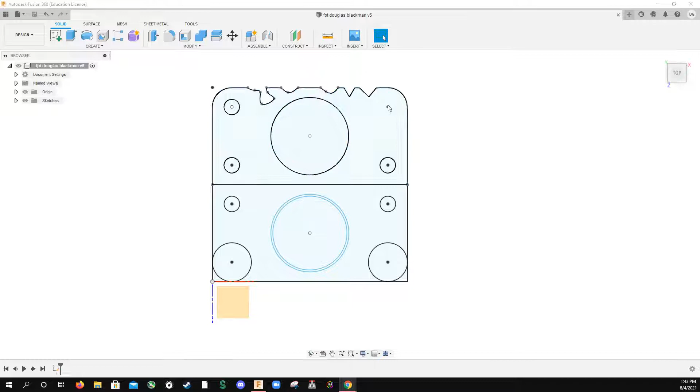So we're going to use the extrude button just here. I'm going to click the extrude button, and I'm going to have a look at this dialog box that comes up. We're not going to use the thin extrude. It's quite rare that you use that. That would just do an edge. We want to extrude the whole thing.

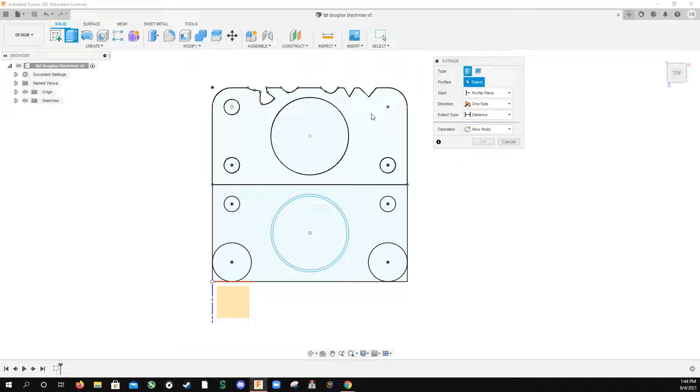And it's asking us for the profile. Now the profile is the shape that goes all the way around the edge and back again. So it's asking for the area that gets highlighted and shaded in a slightly different color. You can see this blue color here.

So I could select this circle, and that would allow me to extrude that circle upwards like this. I can select multiple areas at once as well, and I can extrude all of those up, and I can press the X to get rid of that.

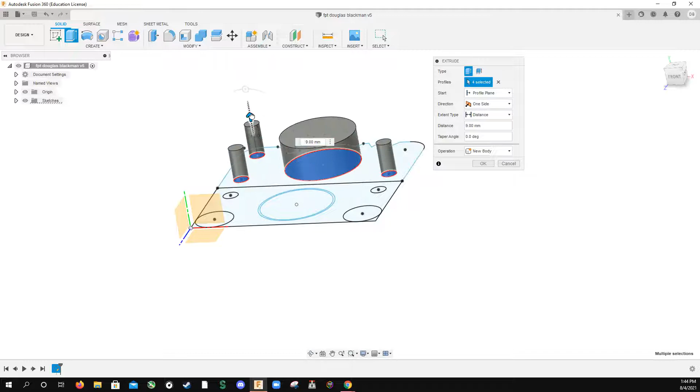And the area I actually want is this area here, and I want this to be 5 millimeters thick. So that's it, that's the only area I want. It's one-sided, it's only coming up once. It's coming up for 5 millimeters.

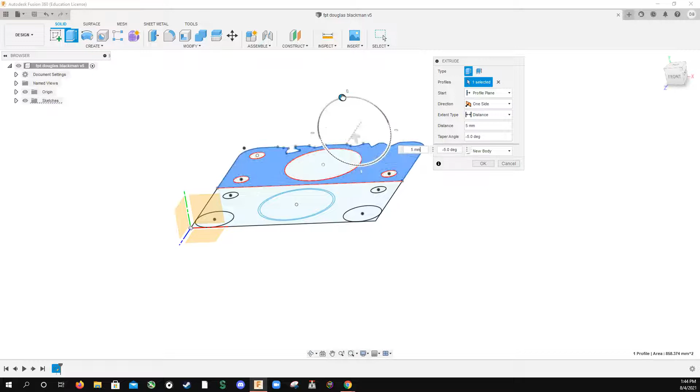I don't want it to have a taper angle. A taper angle means you can make it taper in, or it could taper out. This one's quite tricky because of the edge profile. And I'm going to press OK.

Now pressing OK creates me this new folder here in the browser, and you can see body 1 is now there, and I can make it visible and invisible.

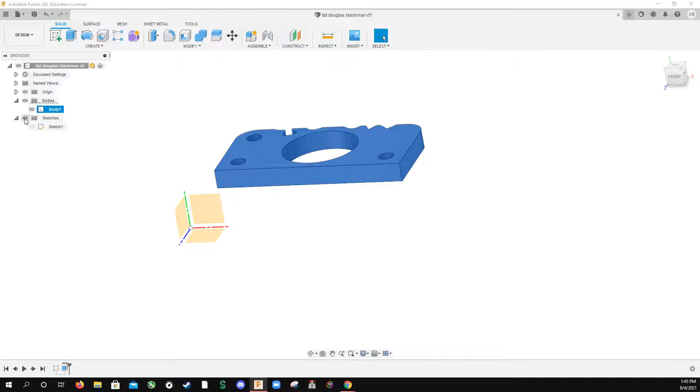Something that Fusion does that kind of irritates me is it will now automatically hide sketch 1. So the first extrude you do will hide the sketch. So if you draw something and extrude something and it disappears, that's what you need to do. You need to go to sketches and unhide it.

Next, I'm going to press extrude again, and I'm going to extrude this side here, and I'm going to extrude this one 5 millimeters as well. Now, what you can see occurring here is that these two pieces are joining together. It's trying to make them one block, and that's visible through the join operation.

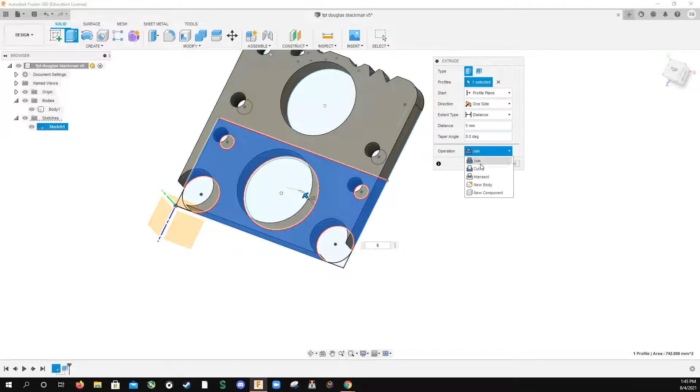Now I don't want it to do that. I want it to be a new piece. So I'm going to go to new body, and you can see my line has reappeared to show that these are two separate things. And I'm going to go ahead and press OK.

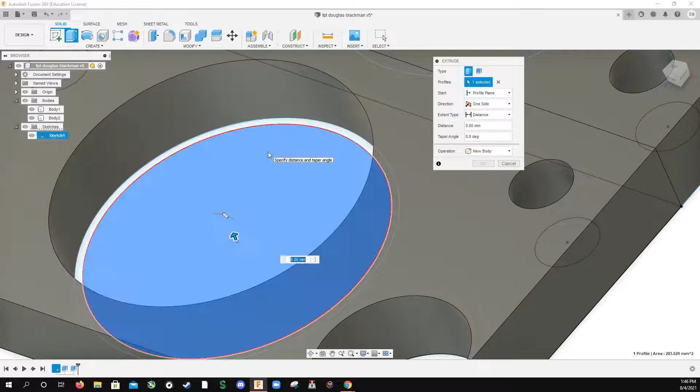And I'm also going to extrude the circle here in the middle. Now it's really important that I zoom in. I don't want to get this circle, I want to get the circle in the middle. So I'm going to select that one, and I'm going to make this one 10 millimeters.

This one does say new body because it doesn't touch, and I'm going to press OK. So I now have that in the middle of there. And that's how we extrude those pieces.

Once we've extruded these, what we're going to have a little look at is how to move these pieces. So there's lots of options when we move things.

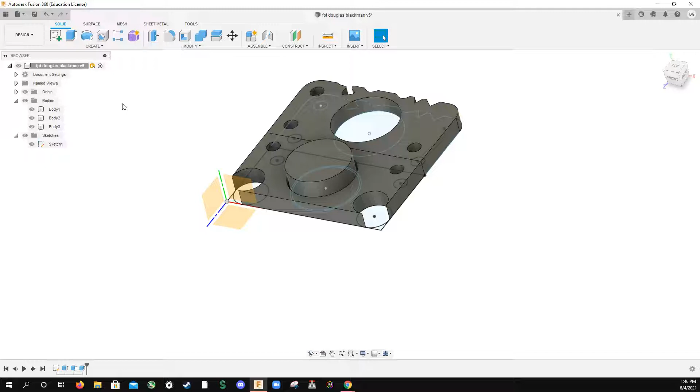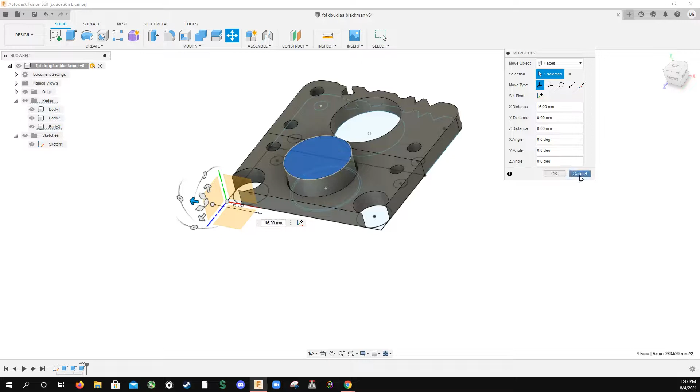So what I want to do is stack this piece here on top of this piece here. So I'm going to go ahead and grab body number 1, and right click on it. And that brings me to the move option.

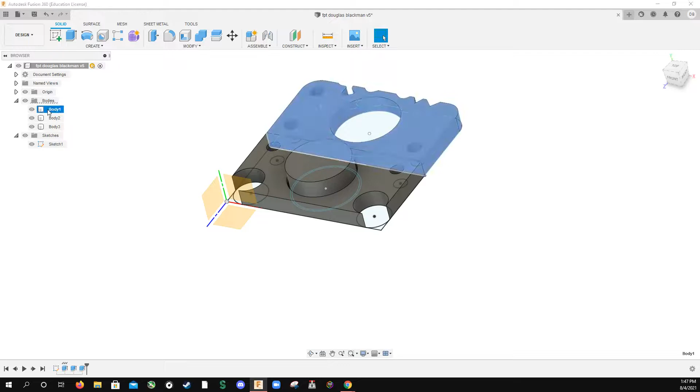Now, right clicking on a touchpad can be a little bit tricky sometimes. So what you might want to do is, if your right click isn't working very well, select body 1 by clicking on it like this, and then press the M key.

And now we're going to look at how to move this. So what I'd like you to do is take a screenshot with it selected like this, and come to the next video, and I'll show you how we move this and how we use these different functions here. See you in a bit.